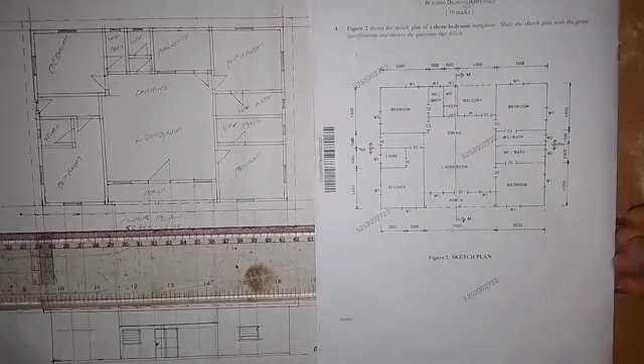So the first thing that we are going to do for us to produce the left end elevation of the building is to draw a ground level line. So we draw this horizontal line, and this horizontal line is the ground level line. So we write GL here. Okay, write GL at this point here.

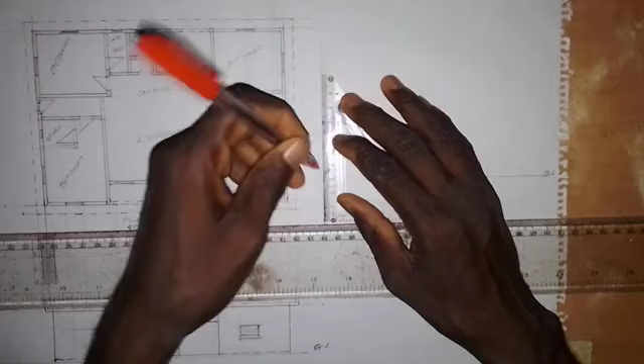Okay, then the next thing that we are going to do is that from this corner here, we are going to see this corner, that is the edge of this wall here. So that is where we are starting from. So at this point here, we are going to erect a vertical line. Okay, just a short vertical line like this.

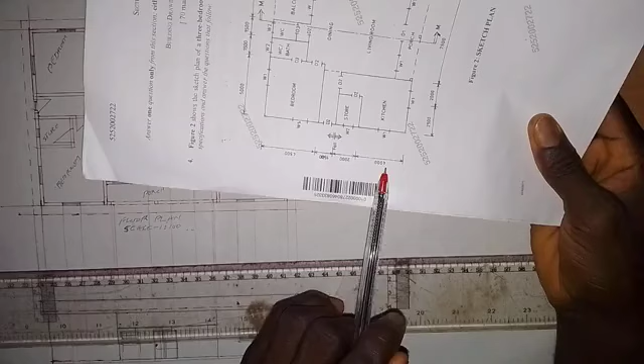And the next thing that we are going to do is let's look at the distances that we have here. So we want to come and get the edge of this wall. So what is the distance from here to here? The distance from here to here is the addition of this. So here we have 4,500 plus 1,500, that will give us 6,000. 6,000 plus 2,000, that is 8,000, and 8,000 plus 4,000, that will give us 12,000. So 12,000 by 100, that will give us 120 millimeters.

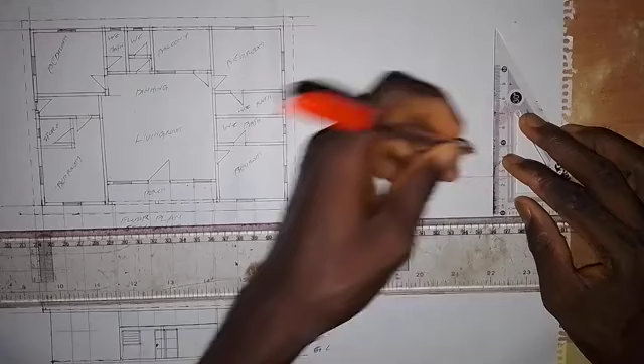So we take a measurement of 120 millimeters. I'm making use of this set square, so we have this to be 100, then I will add 20 to this, so this is 20 millimeters in addition. And I'm going to draw a vertical line at this point here. So here we have this. All right, so we have positioned the edge of this wall here, and we have also positioned the edge of this wall here.

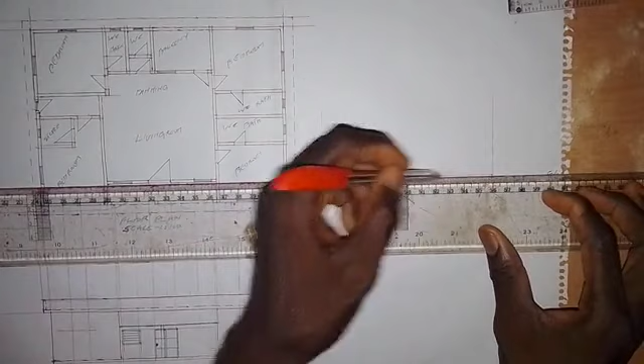All right, so before we put the windows there, let's go and work on the roof first. For us to draw the roof, we need to get the floor level line. The floor level line is not usually stated in the specifications, but we can take it as 1.5 or 2 millimeters. So I usually take it as 1.5. So from this point here, I will draw a horizontal line from here to this side here. So we have this.

All right, then in the specifications, we are given that the floor to ceiling height of the building is 3,250. 3,250 is the floor to ceiling height. So if you divide 3,250 by 100, that will give us 32.5. So we make it 33 millimeters. So we take a measurement of 33 millimeters up this floor level line. So here we have 33 millimeters.

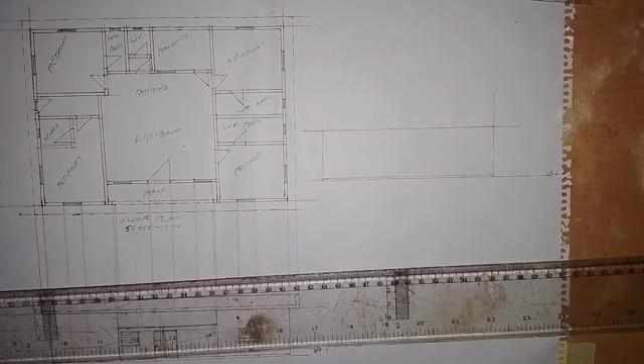So at this point, we are going to draw a horizontal line through here, okay, like this. I'm looking at this line. Okay, so the line is now straight. All right, so the next thing that we are going to do here is to draw the roof. The type of roof that we have here is a parapet roof or flat roof. As we have constructed it here, that's the same type of roof that we also have here.

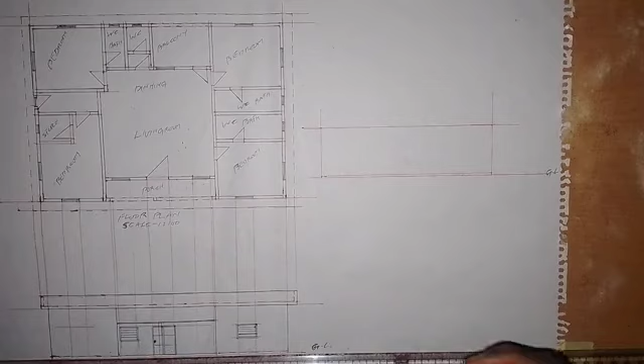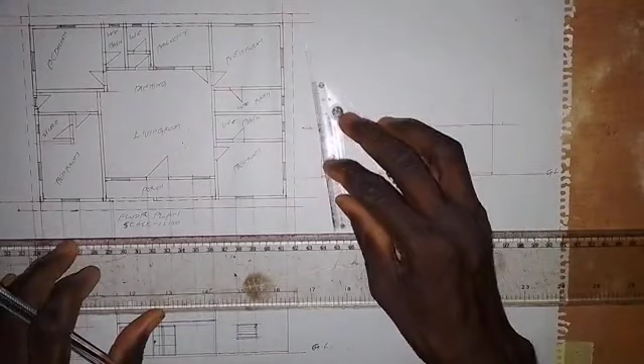Okay, so the eaves projection is not stated in the specifications, so I'm going to take it as 6. I think I used 6 millimeters here for the eaves projection, or okay, I used 7 millimeters, so I'm going to use 7 millimeters here for the eaves projection. So take a measurement of 7 millimeters to the left side, and 7 millimeters to the right side. Okay, so at this point here, we are going to draw a short vertical line. And here also we come to this point, and we take a short vertical line up like this.

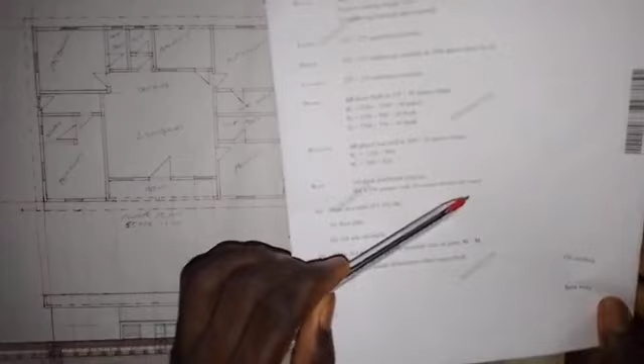Okay, now let's go and look at the roof as we have here, but I've done the same thing here. So as we have that, the components of the roof, as I said, this is a flat roof, so we have 150 thick reinforced concrete, and 750 by 150 parapet with 20 cement plaster all round. But what we need is that we are making use of these two, so 150, and then we also have 750. So addition of that will give us 900. Okay, so 900 by 100, that will give us 9.

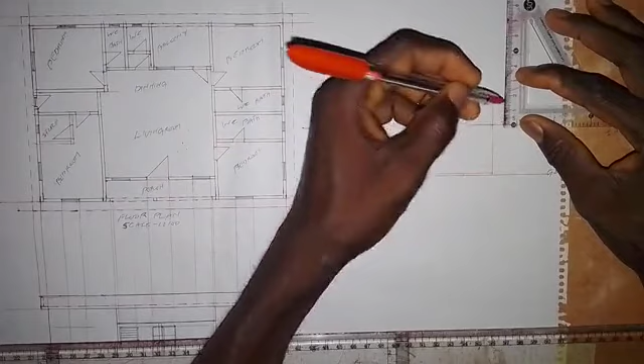But this is what we need to do. So that 150, if we divide it by 100, that will give us 1.5. That is approximately 2 millimeters. Take 2 millimeters up like this. That 750 by 100, that will give us 7.5, approximately 8. So from here, where we have this two, we take 8 millimeters up, and that is the total of 10.

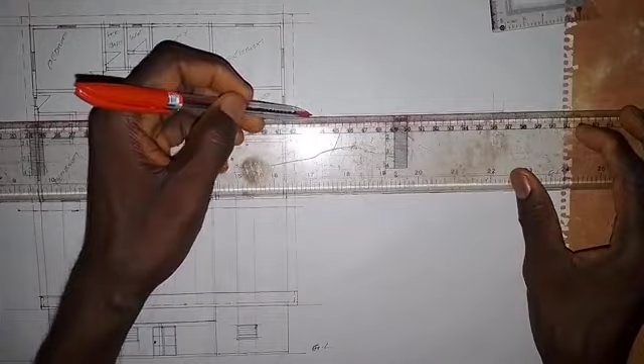Okay, so we are going to draw a horizontal line from this point here to this side. And also at this point we are going to draw a horizontal line here like this. So we are working on the roof. All right, so the next thing that we are going to do here is that there will be a hole within the roof.

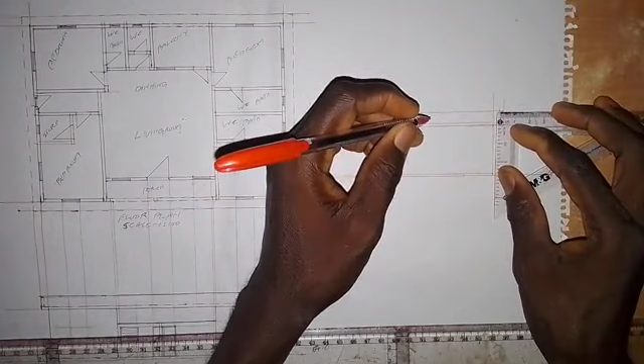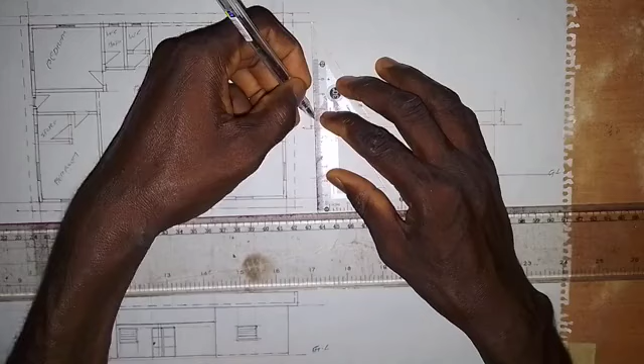So we take a measurement of 2 millimeters inward, and then coming here we also take a measurement of 2 millimeters inward. This is 2 millimeters. So at this point here, we are going to draw short dashes line, because the hole inside the roof cannot be seen from outside. So we make this short dashes line, and also at the same time here we make this short dashes line.

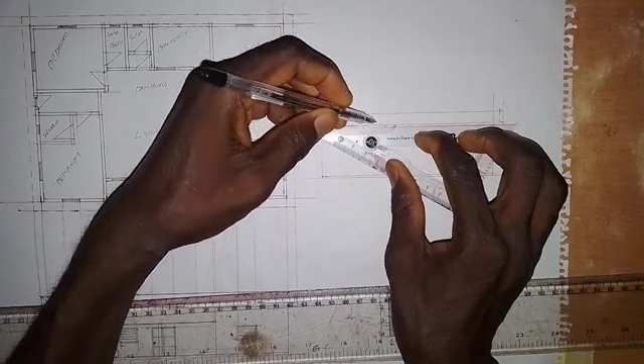Okay, this line, make it a thick line like this. And then this line also, we need to make it short dashes line. So from this point here, where this short dashes line touch, make it short dashes line to this end. So this is how the roof will be. So we make it this short dashes line to this end here. Okay.

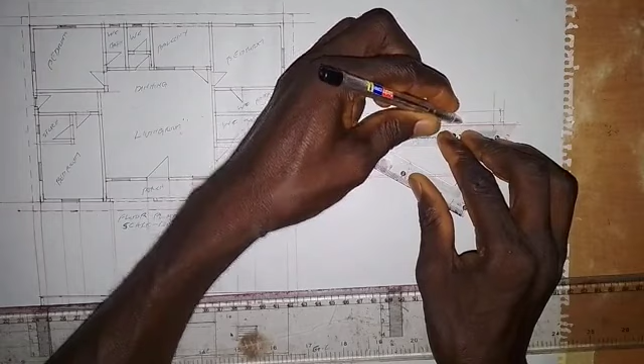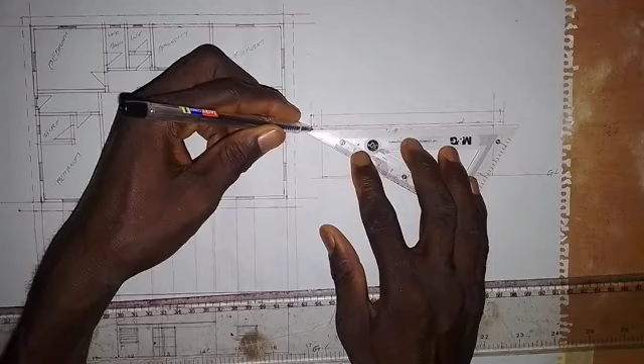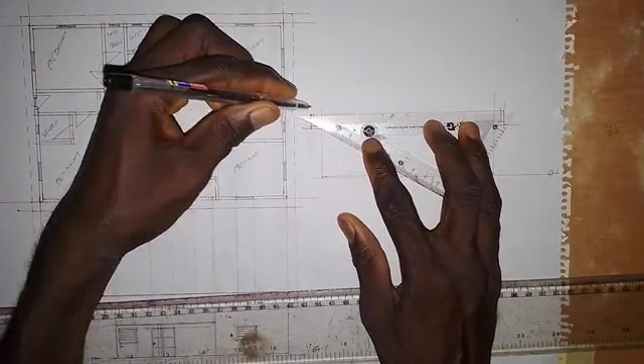All right. So this line, we are going to make it a thick line from here to this end. And then this line we make it a thick line, and this line also, we have to bring it out. So that is the top edge of the roof. So this line, let's make it a thick line at once, and this line we also make it a thick line at once.

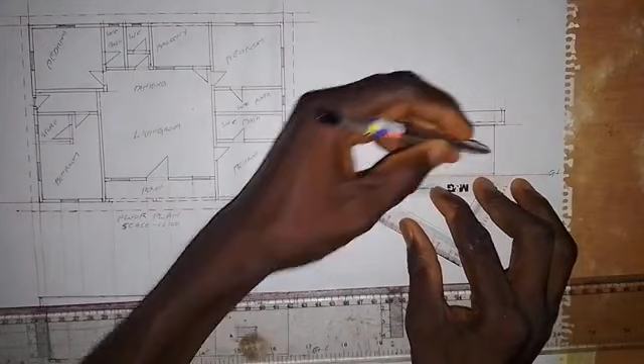And then the floor level, we can't see it from outside. That's the floor inside the building, so we can't see it from the outside. So we make the whole of this line a short dashes line, from here to this end here. Okay. So this is the floor level line. The floor of the building cannot be seen from outside. So this is how we have to have the roof of the building.

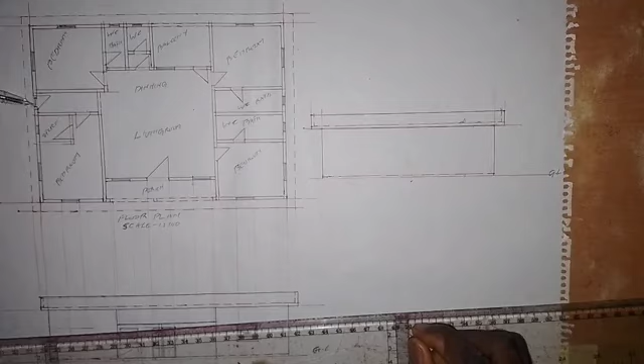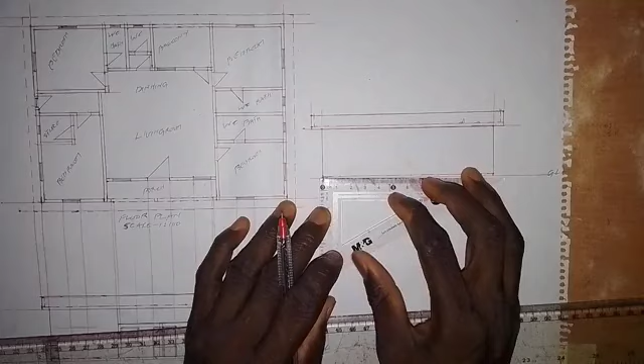Now let's put the windows. So we have this window here, and this window. So let's position the window here. Let's get the distance, so I just want us to position it right. So distance from here to here as we have is 4,500, that is 45. So we have 45 millimeters here.

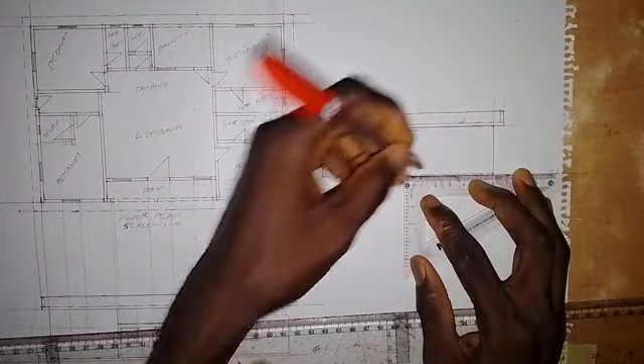And then next one, for this one we have 1,500, that is 15 millimeters. Within this 15, we have positioned this window, and then this one is 2,000, so that is 20 millimeters. So the rest as we have here is 4,500. Am I looking at it as I'm supposed? Okay, so the rest is 4,000. So let's just draw a vertical line partially here, like this.

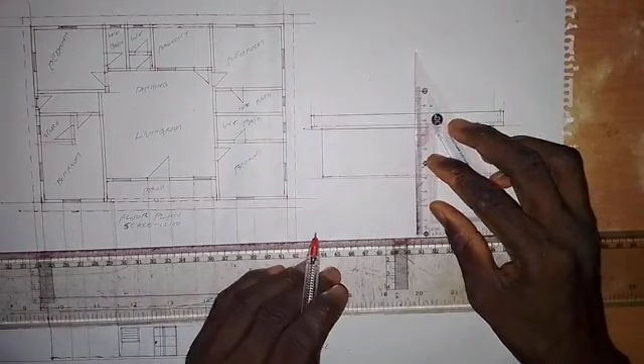Okay, we draw it here so that we can rightly position the windows on the surface where they are supposed to be. All right, so now let's go.

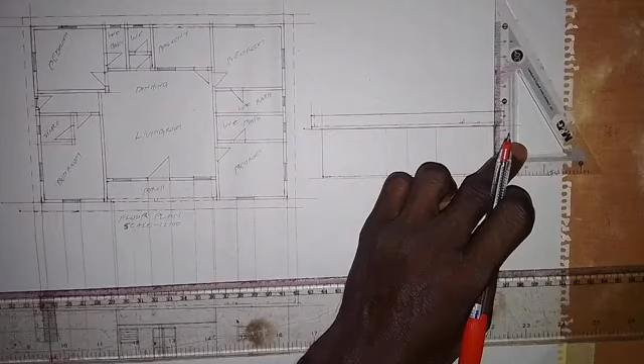Before we draw the window, we need to take a measurement of the height of the window, because the top of the window and the top of the door are the same level. The height of the door is 2100, which will be 21 millimeters. So we take a measurement of 21 millimeters here.

So here we are going to draw a horizontal line all through this surface from here to here. This will be the top of the window.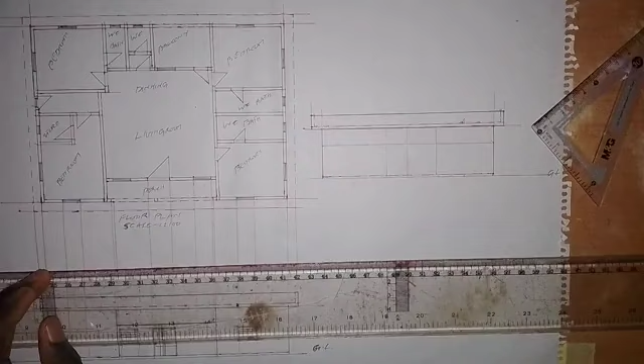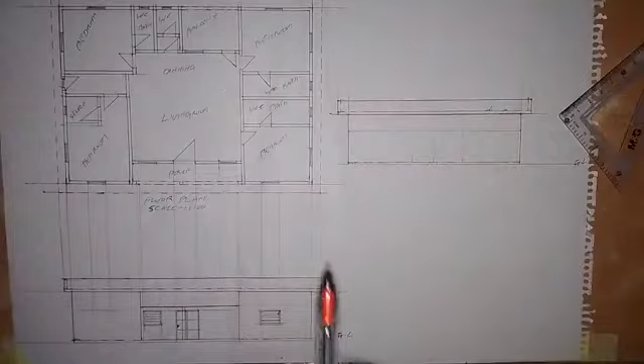Now for the window that we have here, its specifications, I think that is W2. We have W2 here, it's W1, so it's in the bedroom, and the dimensions are: the width is 1200 and the height is 900.

So we come to the middle point here, somewhere around here. We take 12 millimeters, so from here to here this is 12 millimeters.

All right, so then we are going to draw a vertical line down here, and then we also draw a vertical line down here. We take a measurement of 9 millimeters down. This is 9 millimeters.

So we are going to draw a horizontal line here, because we also have the same type of window on this side, so I'm going to transfer it to this side. We draw a horizontal line here, and we also draw a horizontal line here like this.

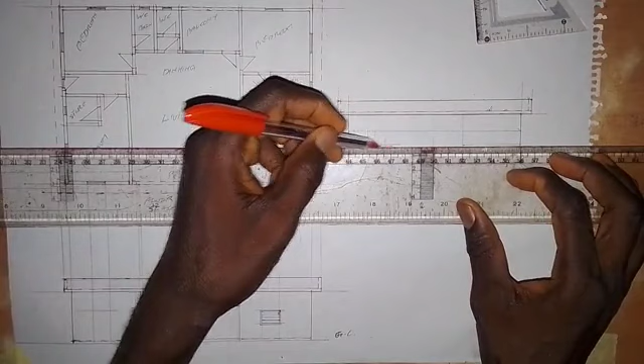So then I'm going to come down a bit for the frame and draw a horizontal line like this, and then up here I'll do the same thing, coming down a bit and drawing a horizontal line for the frame. Then coming out a little bit, for the frame I will draw this, and here also I will draw this like this.

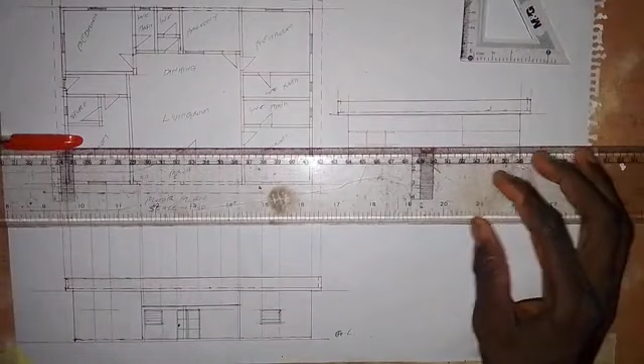So then I'm going to make this line a thick line from here to here, and this also a thick line from here to here, and here I will also make this a thick line, and this line I will also make it a thick line. Okay, so we have this.

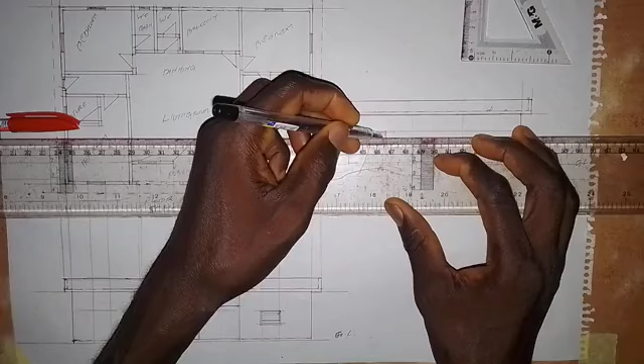So then I'm going to break this down into small pieces, because this is a louver window, so we need to show the glass. All right, so we have this, I'll make this line a thick line here. All right, so we have positioned this window.

We also have the same type of window here, so I believe we can do that. And then the windows that we have here, W2, are 600 by 600. I'll just do one of them on this surface, so I put one of them here.

The line was not a straight line. All right, so I'll put one of them here, 6 by 6, so just one of them.

So you can just repeat this one here. So that's 6 millimeters from here to here, 6 millimeters.

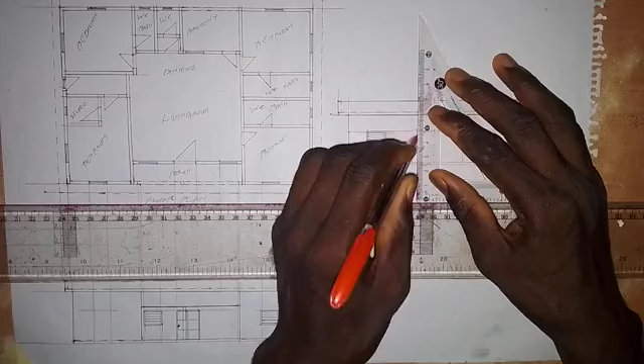So I'm going to take a vertical line down here, and then I will take 6 millimeters down from here. This is 6 millimeters, so here I will draw the horizontal line.

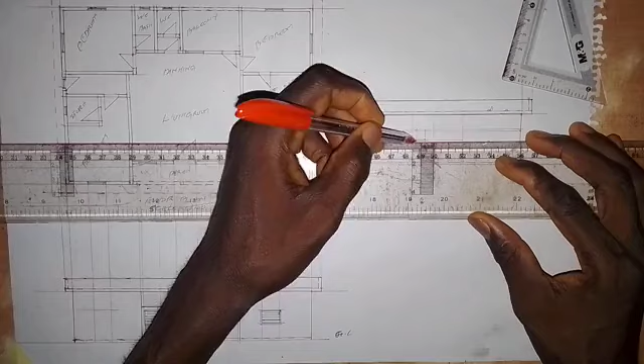Because I'm repeating the same thing on this side, you can just draw the horizontal line here, and then I will come down a bit and draw a horizontal line. So for here now, for the frame, I'm going to draw this line.

All right, so it's also a louver window, so I also put these lines for the glass on the window. All right, so we have this, the window, and we are going to have the same thing repeated here, and this one we have it repeated here.

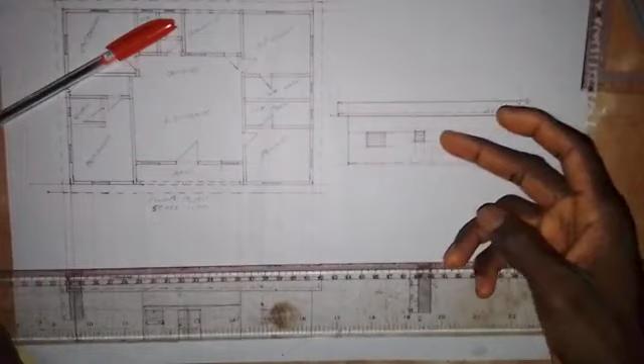So this is the left hand elevation. All right, so this is the left hand elevation, and as I said, we have to repeat the same thing here because we are repeating this here. That's why I don't draw it, and we're also repeating this particular window here.